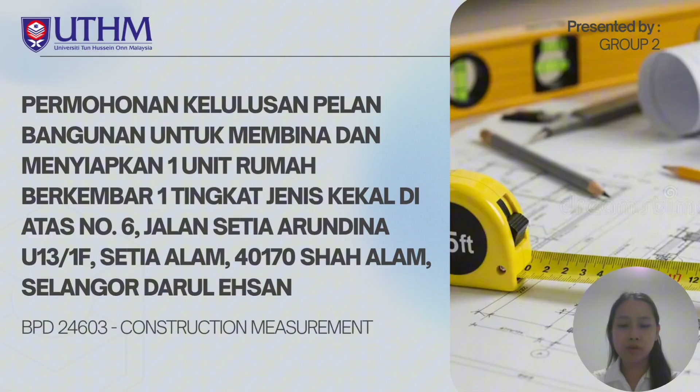The title of our project is Permohonan Kelulusan Pelan Bangunan untuk Membina dan Menyiapkan satu unit rumah berkembar satu tingkat jenis kekal di atas nombor 6, Jalan Setia Arundina, U13/1F, Setia Alam, 40170 Shah Alam, Selangor Darul Ehsan.

This is our group members. We have a total of 7 people in our group. This is the table of contents for our slides. We have introduction, excavation for ground beam, concrete for ground beam, formwork for ground beam, brickwork, 300 mm by 300 mm floor tiles, weather shield, painting, formwork in column, and reference.

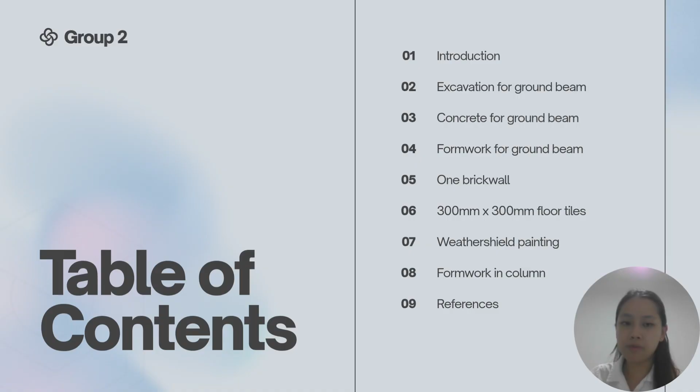In the construction industry, accurate measurement and documentation are critical components that bridge the gap between architectural design and financial. The primary aim of this project is to develop technical proficiency and practical skill in construction quantification. By engaging with this project, we will achieve the following core capabilities, such as standardized measurement. We will accurately measure building elements in strict accordance with the Malaysian Standard Method of Measurement of Building Works (SMM2).

Second is BQ preparation, aligned with the standardized guidelines set by SMM2, utilizing appropriate measurement and taking-off paper to maintain systematic and industry-standard documentation. Furthermore, by creating a bills of quantities, we can learn how to structure a professional BQ, such as preliminaries, the indirect cost of a project such as site insurance, temporary scaffolding, site office, and so on. Second is building work, the direct cost of material and labor for the physical structure.

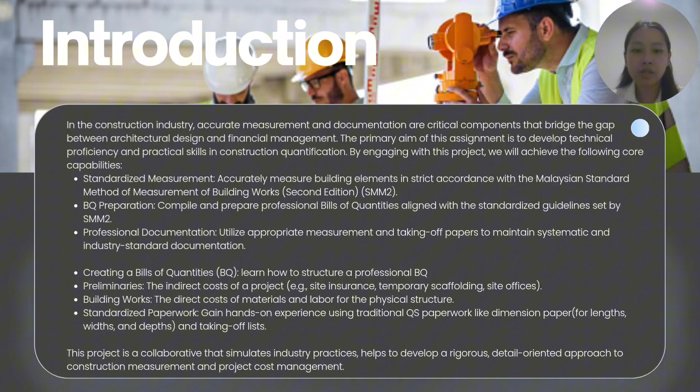The last one is we can gain hands-on experience by using traditional QS paperwork like dimension paper to calculate the length, width, and depth, and taking-off list. So this project is a collaboration that simulates industry practice and helps to develop a rigorous, detail-oriented approach to construction measurement.

Next, I will be presenting the measurement and taking-off process for the excavation for ground beam. Our main objective is to excavate pile caps and trenches for ground beams between piles, stating the starting level as per Clause D11. In accordance with the SMM guidelines, all excavation work is measured by volume using cubic meters as our standard unit. To find this volume, we apply the standard formula, which is length multiplied by width multiplied by depth. Furthermore, to ensure accuracy in these dimensions, we will refer to our ground floor beam details plan to get the exact physical dimensions of each individual beam type.

On the left side, we systematically broke down the calculation by beam mark to avoid confusion or double counting. For example, GHB2, whose size is 150 mm by 500 mm. We took the clear length of 6705, which refers to the plan, and we multiply it by the width and depth. So the calculation is 6.71 times 0.15 times 0.5. So the total cubic meters will be 0.5.

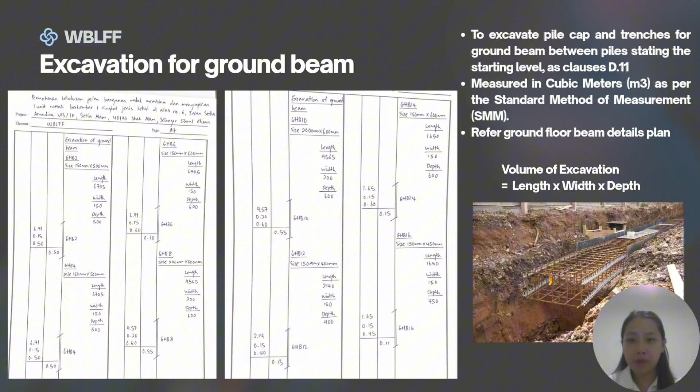For further information on excavation for ground beam, these are all the beam types we have already calculated, and the right side is the taking-off list for the work below lowest floor finishes.

Next, we move to concrete for ground beam. For ST1 column stump, we got 0.05 meter cube. For C1 column stump, we got a total of 0.19 meter cube. For C1A column stump, we got 0.04 meter cube. Next, C2 column stump, we got 0.09 meter cube. C3, 0.05 meter cube. And last, C3A, we got 0.09 meter cube. So the total of column stumps is 0.51 meter cube.

Next, we move to pad footing for concrete work. For pad footing F1, 0.15 total meter cube. For F3 pad footing, we got 0.62 meter cube. For F4, we got 1.13 meter cube. For F5 pad footing, we got 3.68 meter cube. And last, for F6 pad footing, we got 3.96 meter cube. So the total of pad footing, we got 9.54 meter cube.

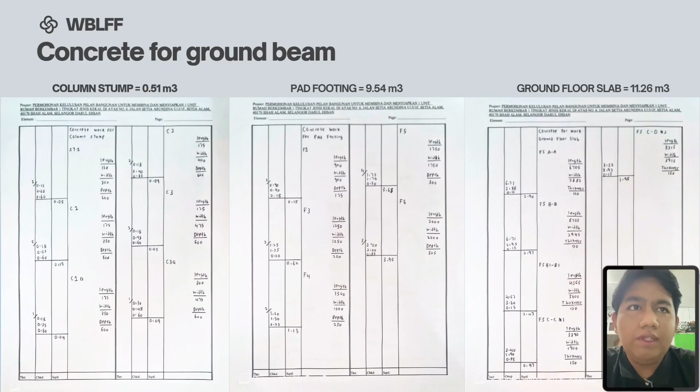Next, ground floor slab for concrete work. For area A, we got 2.90 meter cube. For area B, 2.97 meter cube. And for area B1, we got 2.47 meter cube. For area C, we got 0.97 meter cube. And the total of ground floor slab is 11.26 meter cube.

Next, we move to concrete work for ground beam. For GHB2, we have 0.50. For GHB4, we have 0.50. And GHB6, the total is 0.58. For GHB8, the total is 0.55. GHB10, we have 0.55. For GHB12, we have 0.13. For GHB14, we have 0.41. And GHB16, we have 0.11. And for GHB18, we have 0.11 also. And lastly, for GHB20, we have 0.28. So the total of ground beam is 3.92 meters square.

For apron slab concrete work, for area A we have 0.23, area B 0.23 also, and area C we have 0.20. For area D we have 0.67, and area E we have 0.15.

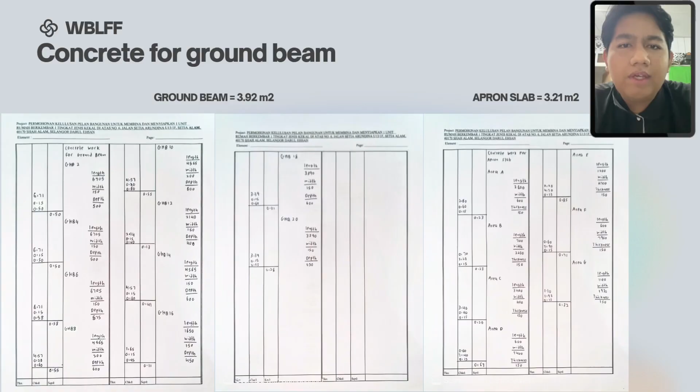For ground beam, measure the length of each ground beam and multiply it by the beam depth to calculate the formwork area for each beam. Then add all the individual beam formwork areas together to obtain the total ground beam formwork area. Total ground beam formwork area is 5.89 meter square, and total ground floor slab area is 144.66 meter square. That's all for me.

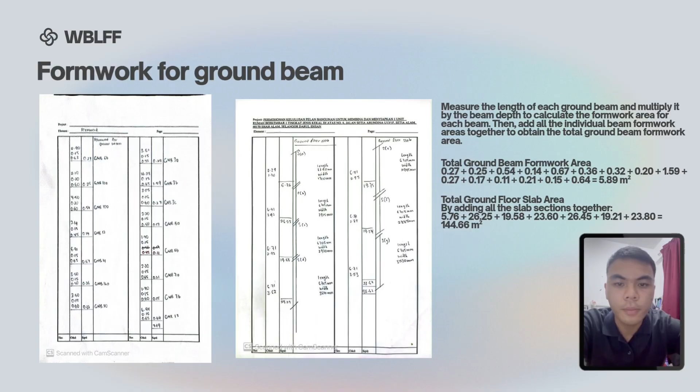Thank you. For the internal wall, the total vertical wall length is 33.15 meter, while the wall height is 3.50 meter. Multiplying the length by the height gives a total wall area of 116.03 meters square. There are two deductions for this wall, namely D5A and D4, each measuring 1.47 meters square. Therefore, the total net area for the vertical wall is 113.09 meters square.

Next, the total horizontal wall length is 46.80 meter, with a wall height of 3.50 meter. Multiplying the length by the height gives a total wall area of 163.80 meter square. For this section, there are 4 deductions with a combined area of 6.72 meter square. After deducting this amount, the final net wall area is 157.08 meter square.

Next, the total length of the damp proof course is 79.95 meter. This value is obtained by adding the two wall lengths, 33.15 meter and 46.80 meter. Finally, for the bonding ties, its total quantity is 126 nos. This figure is calculated by multiplying 9 times 2 times 7. That's all.

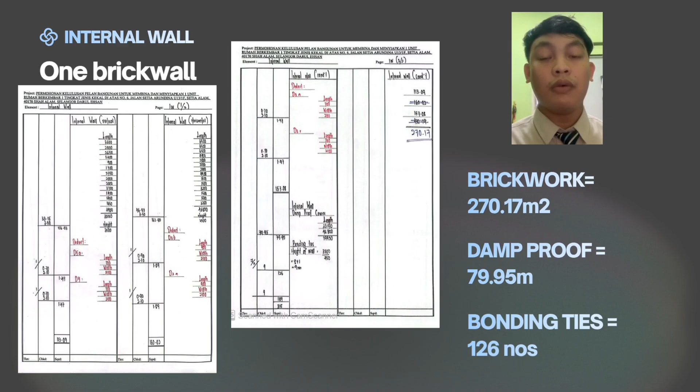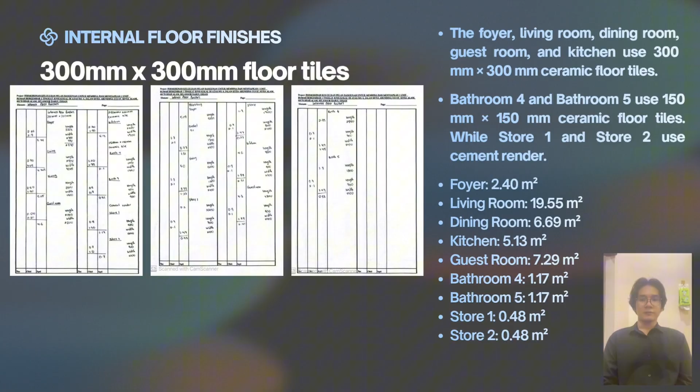For the internal floor finishes, the foyer, living room and dining room, guest room and kitchen use 300 mm times 300 mm ceramic floor tiles. These tiles are durable, easy to clean and suitable for areas with frequent daily use. Bathroom 4 and bathroom 5 use 150 mm times 150 mm ceramic floor tiles to provide better grip and reduce the risk of slipping. Meanwhile, store 1 and store 2 use cement render because it is economical, durable, and suitable for storage areas.

Now, I will present the final net area for the internal wall finishes. Okay, the first step is total wall length: 33,150 mm plus 46,800 mm, so the total is 79,950 mm. Wall height, the architectural ceiling height is 3,500 mm. So gross total area, multiplying length by height, gives us 79,950 mm times 3,500 mm. So the total is 279,825,000 mm square. Okay, so converted to m it is 279.83 m square for the final squaring column.

Okay, the second step is deduction of openings. For example, door 3B. The door measurement on the plan is 900 wide by 2,100 mm height. Multiplying this gives us an opening area of 1,890,000 mm square for the single door, equal to 1.89 m square. So the total deduction area for all 5 doors on this sheet is 8,190,000 mm square, converted to 8.19 m square.

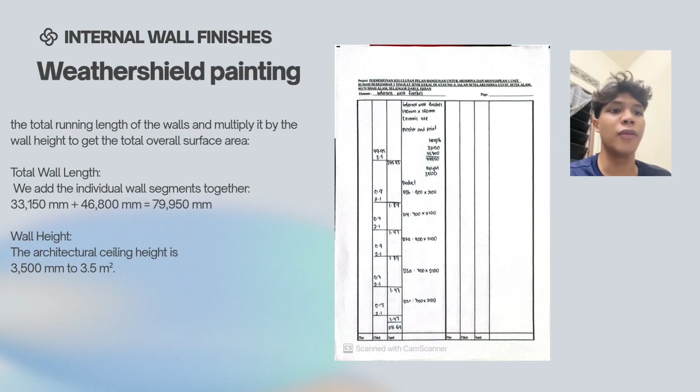So the gross wall area of 279,825,000 mm square, less total door deduction of 8,190,000 mm square. So the net internal wall finishes area is 271,635,000 mm square. Converted to m it is 271.64 m square. The squaring column is what we transfer directly to our bill of quantities, BQ. This ensures the contractor orders the exact amount of plaster, paint or tiling required for the project without costly waste. That's all.

Next, element frame formwork in column. The first step is to find the girth. Girth means the total perimeter around the column. It is calculated by adding all 4 sides of the column cross section. This girth is then multiplied by the column height to determine the total formwork area in square meters. The same method is used for all the other column types on the page. Given here, the height was 3000 mm.

For example, ST1: 150 mm multiplied by 2 and 300 mm multiplied by 2, then it equals 900 mm. Then the 900 mm we multiply by the height of the column, which is 3000 mm or 3.00, and the answer will be 2.70. That's the total.

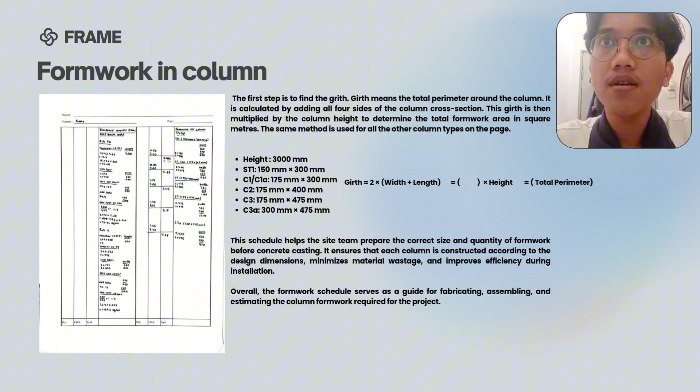This schedule helps the site team prepare the correct size and quantity of the formwork before concrete casting. It ensures that each column is constructed according to the design dimensions, minimizes material wastage, and improves efficiency during installation. Overall, the formwork schedule serves as a guide for fabricating, assembling, and estimating the column formwork required for the project. This is the reference of our BQ.